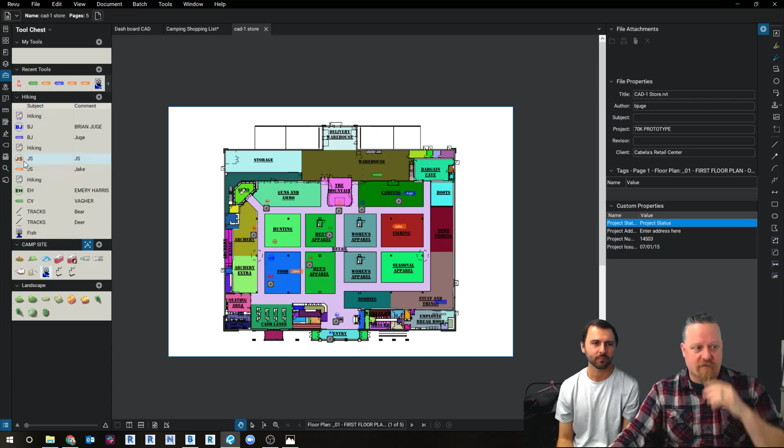In here, we can see as we're going through this, we have our different punch walk items. So Jake might be in hunting or men's apparel, he could go out there and pull that in. Now the nice part is, if we have this area defined in there, this space that could be inside, we can track where this is at, the link, the status, all these different things.

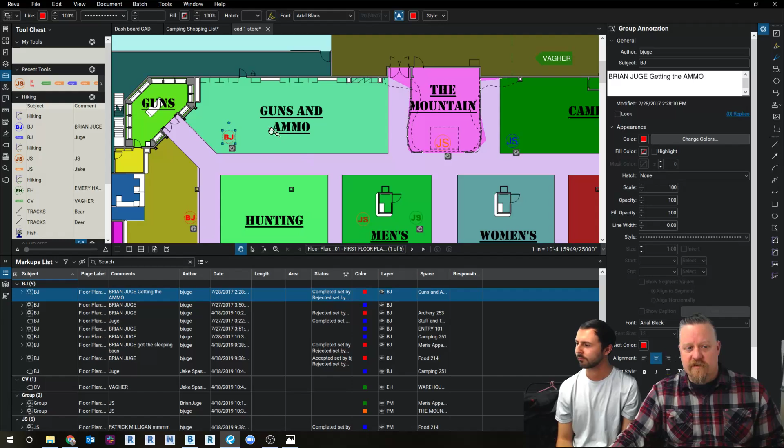We can see the spaces are in here. So as I can see that maybe I'm in guns and ammo, but if I pull myself over here into archery, it's now saying I'm under archery. And what we have is incredible—the ability to, as I'm doing punch walks or going into the store, it's keeping track of what section we're in. So Jake might be in men's apparel, and then Jake wanders over into women's apparel, and all of a sudden now it's going to update and say where you're at.

So you created spaces. What's kind of like the underlying thing driving this right now? So a couple of things—there's these hidden things inside called spaces that we can get into. Every single one of these areas is outlined in that document, and you can see as I'm clicking on them, they're highlighting in here a little bit. So if we go down to the archery one over here, it's going to light up and say that's that particular area.

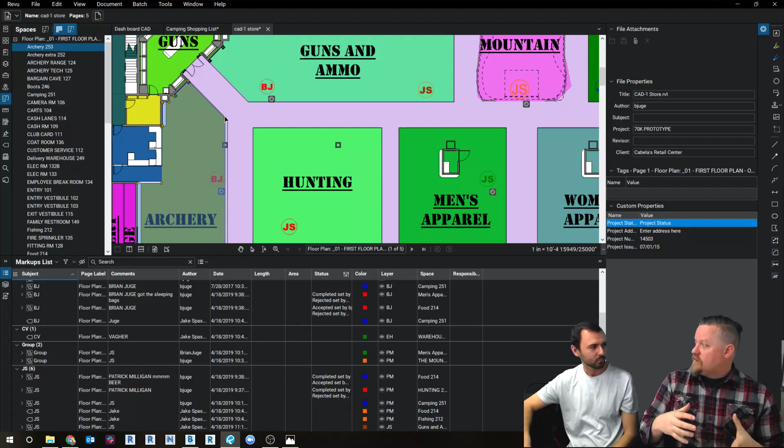Now, one of the cool things, if you have Bluebeam CAD or Extreme and you're using Revit, you can actually drag the rooms directly into Bluebeam. There's an application in there that'll allow you to drag the room information directly over, and that'll get the room name, number, whatever fields you want out of it from that space data. Another thing they put in there, Jake, is that they'll actually allow you to take the room calculations—so the areas and perimeters will come directly over with it, if you want.

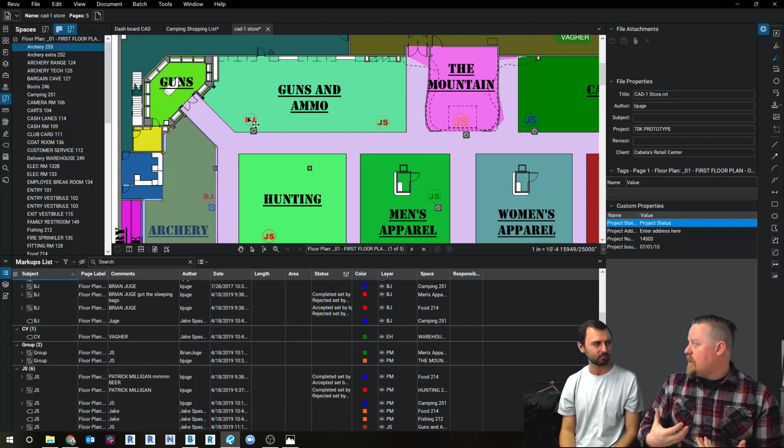So we don't have to go in and mess around with what was defining this area, what was defining this room—now we've got that in there. And so when you go to walk the site, you can go in there and put these punch walk items. Now I just have the punch walk items as our initials that we're shopping in here, but these punch walk items, at least the ones out of the box, could represent like an electrical wiring issue, or this thing was installed incorrectly, or something like that.

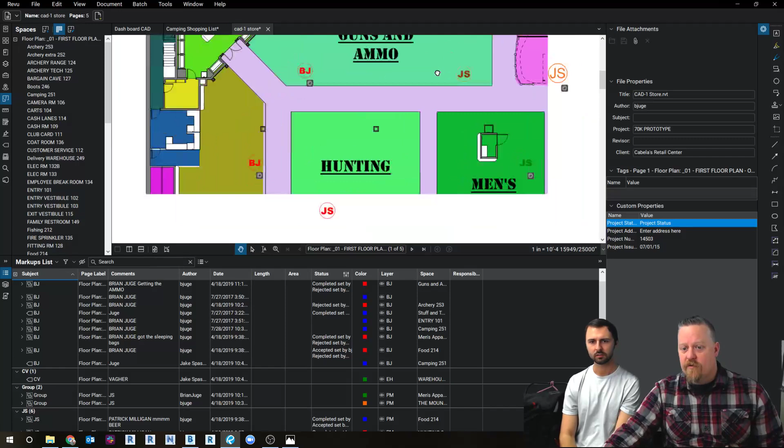And as we're going through that, we could actually take pictures to those. So I'm going to come back in here, click on this, and when I do that, I can click a picture and kind of show what that issue was that I was tracking. And obviously, as we're going through here, we're starting to track the things we're looking for on our trip, our different things. So Jake, if you come in here and wander around and get into hunting, we could go in there and capture some data.

And if we want, you got to smile.

Oh, it's not working. We're using it for our live stream. Oh, we can't do that. I didn't think about that.

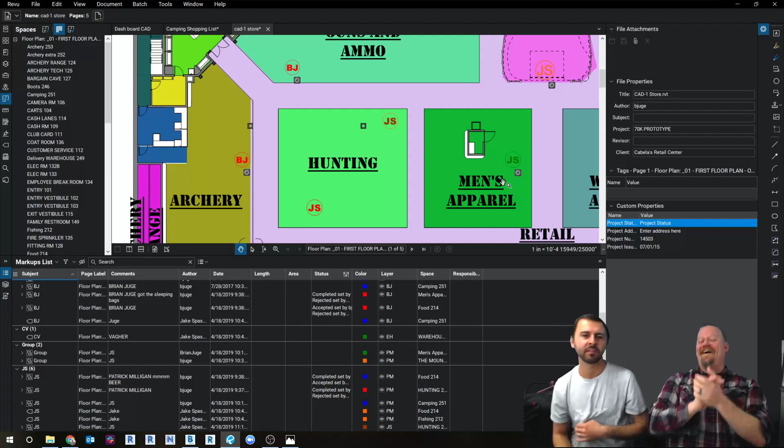I have a technical question for you. If I were to flatten the document, does that make all these things go away? Do you know? I used to know that answer, and I think they get lost.

So one of the things you can do, we're going to find out in a sec, but before that, I'm going to get a capture. Since we can't use our camera, I'll say from file here, and we'll grab this one right here. So now we've got that picture in there associated.

This is a photo of my dad and I. Yeah, there's Tony. So Tony's going to join us on this adventure here. Hopefully Tony's out there. I don't know if he's joined us. Yeah, I think you have to have a YouTube account to be able to. Oh, so that's okay, we'll talk to him later.

But you can add other pictures in here. Some of the nice things is as you're adding these pictures - here's one, this is a 360 photograph of me sitting in this chapel, lodge, taking in what's going on. So you can start doing different things like that inside these areas, taking pictures of what was going on.

Here's another one when we were at Olympic National Park, and we can kind of see what's going on. The cool thing I've been using these for is documenting what was in this space or room. So let's say you're doing some different types of J boxes and conduit in the wall, but you're about to drywall it. It'd be nice to see what was in the room before you drywalled it. Absolutely, we've done that for people. Exactly, we do that all the time. This is like the poor man's field document.

Let's bring this in. If anyone's familiar with Matterport scanning technology, what we've done in the past is when you Matterport scan something, you get a 3D image at each location. We've gone through on a 2D floor plan and dropped in the 3D images at the locations, and then people can just open it up in Bluebeam.

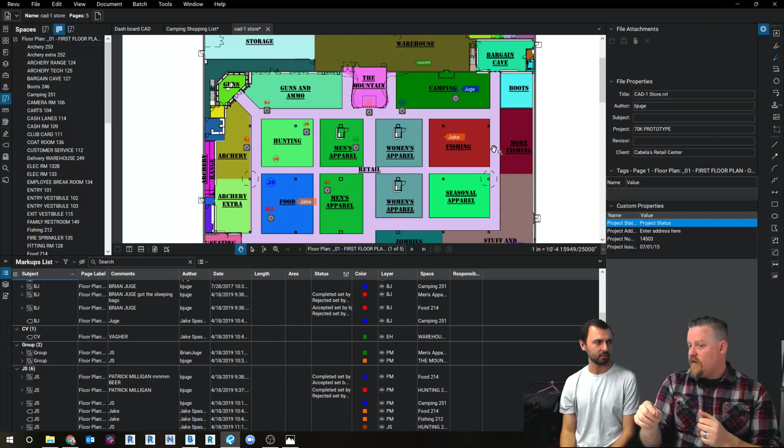And then we have a question. The tool to bring the Revit rooms into Bluebeam, is that just the Revit add-in or the Bluebeam add-in? Yes, the Bluebeam add-in allows you to do that, and then in the options dialog you have the option to go in there and bring in room data and port that directly over. When you download Bluebeam, you'll be prompted to just install the add-in.

If it's not on there, what you can do is go to your Bluebeam administrator - they moved it. So if we open up the administrator, there are the plugins. If we're not running Bluebeam, we just click on that, launch it, hit apply, and it's loaded inside of Bluebeam. Then you go back into Revit, and it's loaded into Revit.

You guys follow us, right? Yeah, we've been camping, it's been rough. Okay, so where to next?

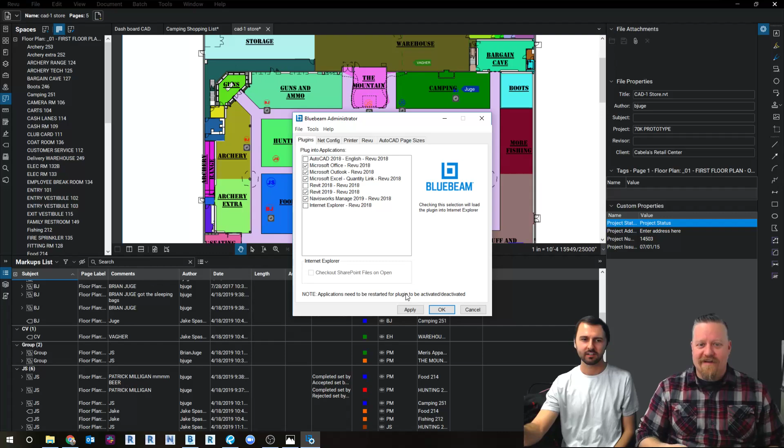Well, we have these in here. We're starting to use our little custom tool sets. I've got my bookmarks that I can link inside, we can start taking pictures. We got the punch walk that we're starting to put together and define what was in the building, but we're taking that directly from the document created inside of Revit, and then we ported it in here. We have all this stuff, we've got it color coded. It looks really pretty, but we can follow all that in here.

So spaces is just kind of a nice thing, but we can make spaces afterwards. If I want to, I can go in here and add a space and put it in there, give it a name - I'll just call it name for now. But now we have that in there, and then we could add things to this.

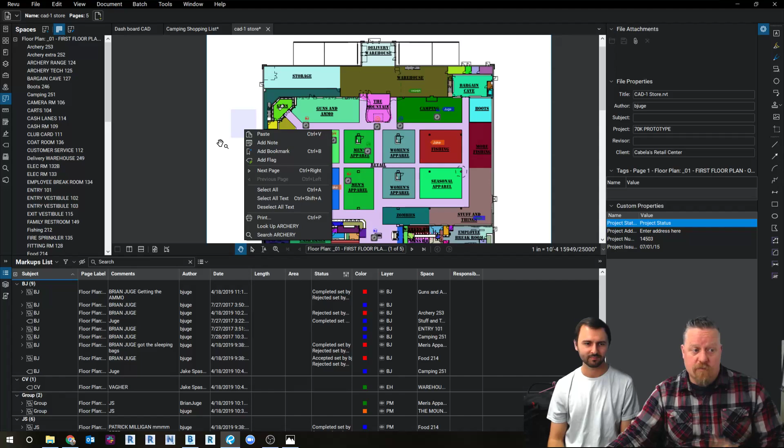Give it a different color, those types of things. So a really cool way of tracking things. And once it's done, it's in the document, people can track it and have all this data they can report back and forth.

That's awesome. All right, so very powerful tools. Yeah, we've done our camping shopping list in here. We've kind of edited things. So now we're backing in here, and we're going to actually go to the store, kind of go look at it real quick.

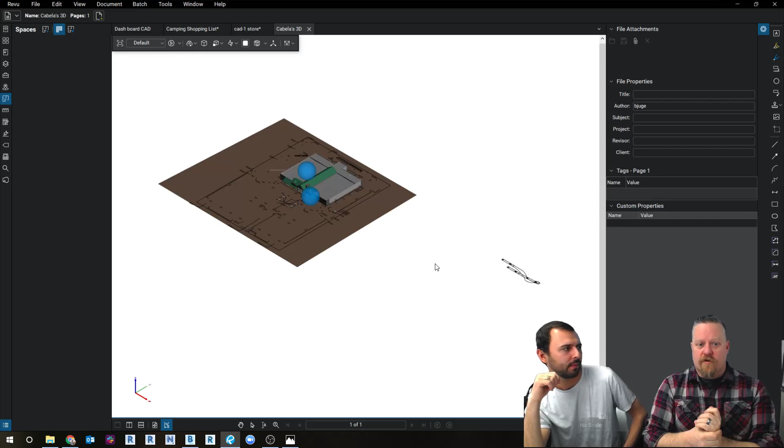This one takes a little bit, but this is another way of looking at the store. We've got the game plan. We might be buying a couple of different items in here. So right now it's taking a little bit to load, but what we're going to be looking at, here it is, we have a 3D PDF of the model.

So what you're telling me is that this is a Revit model being completely viewed in Bluebeam by itself. All you need is Bluebeam to open this up. That is correct, all you need is Bluebeam. You can use the free version to kind of open this up. In fact, you don't even need Bluebeam, we can embed this into a PDF file that some other people can use.

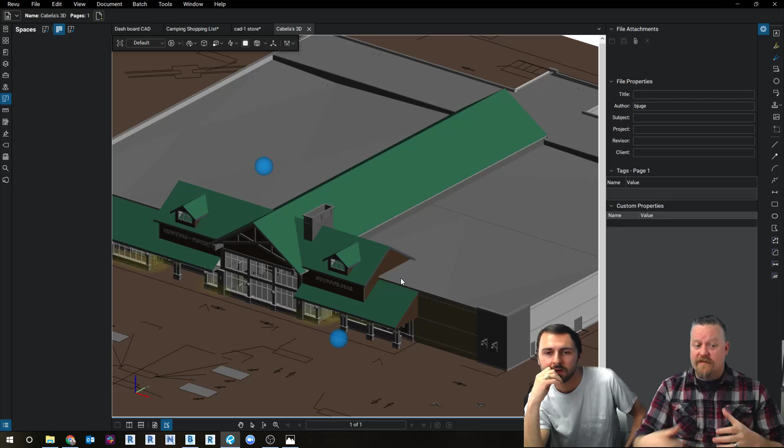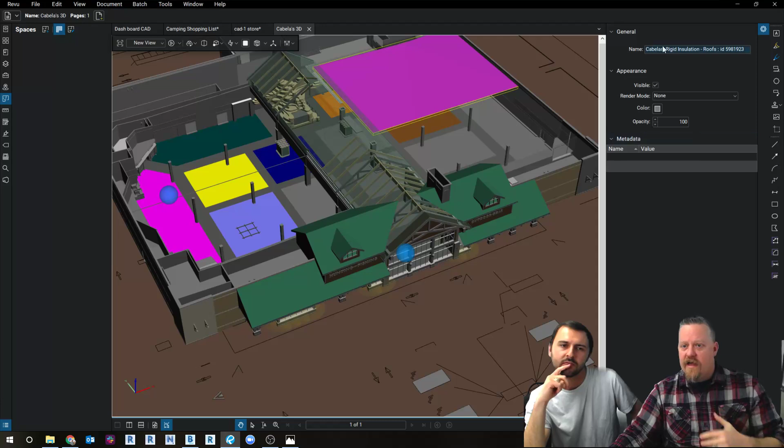And they'll have some of the data in here. So a lot of what's being tracked in here is these different things. So I've actually gone and we've got some different views in there. And if I want to, I can open this up and I can see that we got the views. We got cutaways from those different areas. So I can start to interact with this model. You can see as I start to click things are starting to turn invisible and highlight, and I get some general properties in here. But one of the cool things is this down here, this 3D model tree.

So down in here, what we find is we actually have all the metadata that's coming from the Revit file. So this is kind of like your Navisworks selection tree. This is the poor man's Navisworks. This is definitely the poor man's Navisworks.

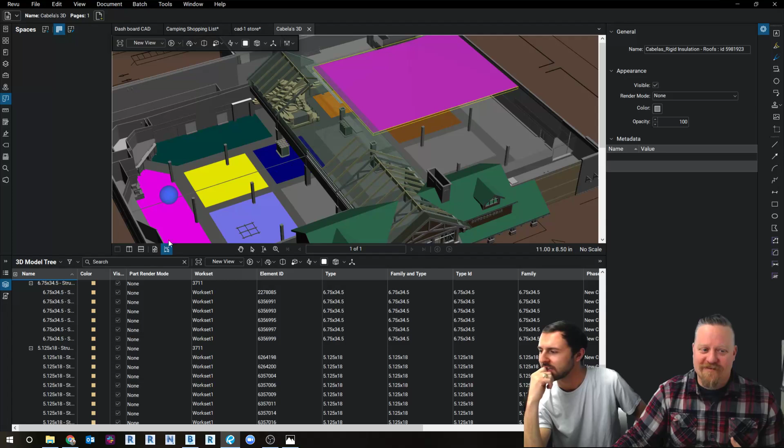So as I'm coming in here, I can start to select this item in here. So if I come in here and I've got some of the structural members in here. So I got this, bring you right to it. Brings me right to it. Gives me all the data that's inside of here about whatever this particular item is. We can see the type of material it is, the structural steel material, what's part of this, what reference level it's on, the height off that level.

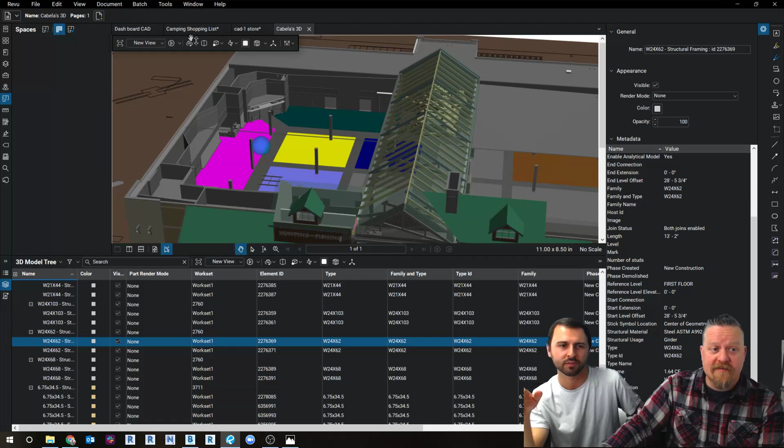So as a project manager, I should probably move my head because I can't see that. There we go. So I just see this as a project manager or superintendent on a job site that maybe doesn't have the computer to even run Revit or the knowledge to do it. They can still open up a Revit file in Bluebeam and get all this valuable data just by clicking around.

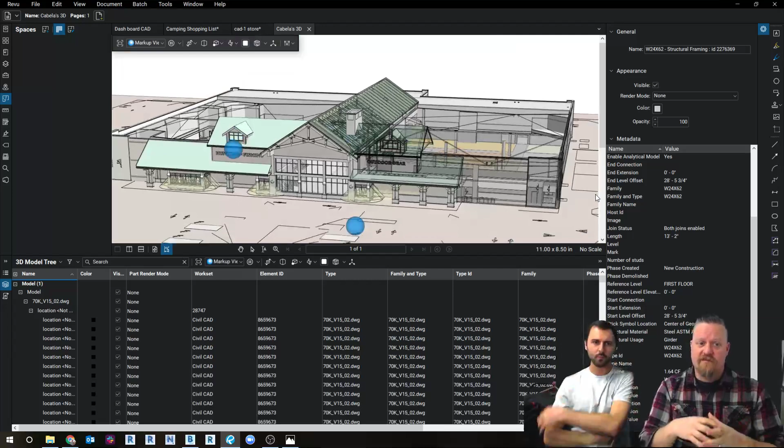Exactly, yeah, and it makes it really easy to kind of run through this. So here I'm going to let it play. So I've kind of set some views up, and here it's running through these different views. We can cut sections in here to kind of view that model. It's running around really quick, and it's a lot smoother on our end, but it's got some changes going on. So we can run back through all these different presets, look at the model, kind of set it up for a meeting if we wanted to, view that with our other documents. We can pull items apart to kind of see how it was constructed in here.

So I'm going to pause that really quick and kind of float through some of these. So if I come back in here, I've got this one with a markup on it. So you can see that we have these, there's no nice way of saying it, see these little blue balls? Those are markups in here. So as I click on them, it's actually going to take me to that view, and it's going to take me right to that markup.

So I can go to the view. I can say, hey, we got some issues in here, and I'm going to cloud that, add some notes. So I might add some notes. Broken.

Tony, this is broken, right? So we've got that in here. And if we wanted to, we can go back and take that picture again, or set a status to this and say this is currently a rejected item, Tony. It is broken, we need to go in and fix it. Then I might capture a picture of a fish, because we're still camping, man, we got to get it out there. So he can go in there and say this fish is broken, we need to fix this. We have some issues going on, and we can see we have a status set up for that particular item.

This becomes a markup, so I have to go back to my markups in here. I see that it's currently rejected by Jake, because we're logged in as you right now, this is me right now. And then as this item gets changed, we can set a status and say hey, this thing's been accepted, or being canceled, or something like that, and change that status.

One of the things we do, we can have these markups change color. We'll get to that another time, not today, but there's ways to make the statuses change. You can see as we're going through this 3D PDF, we can be marking things up, we can be changing it in there. It makes it really nice to go back in that model.

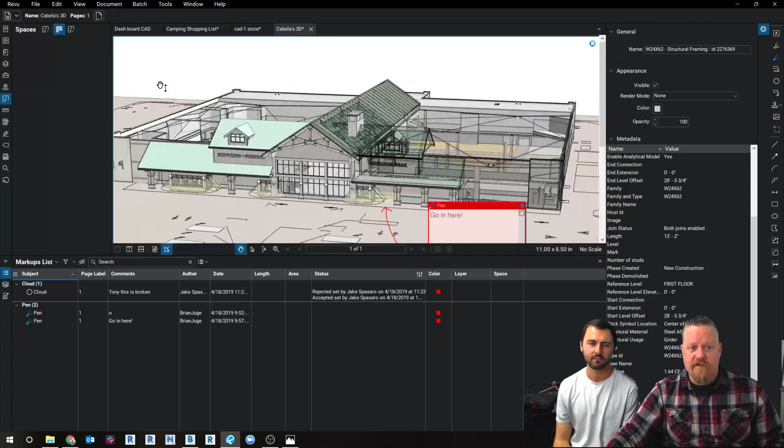So I could go in here and let's float through some of these other views. Here's another one for some of the markups. So this is where we go in, Jake, when we're going in the store, we can go in here. You'll also notice the colors change and everything else. We have the ability to go in here and change it from perspective to an isometric view, and kind of change things up the way it looks to make it look better. We'll go floating through a couple more of these in here that are kind of cool.

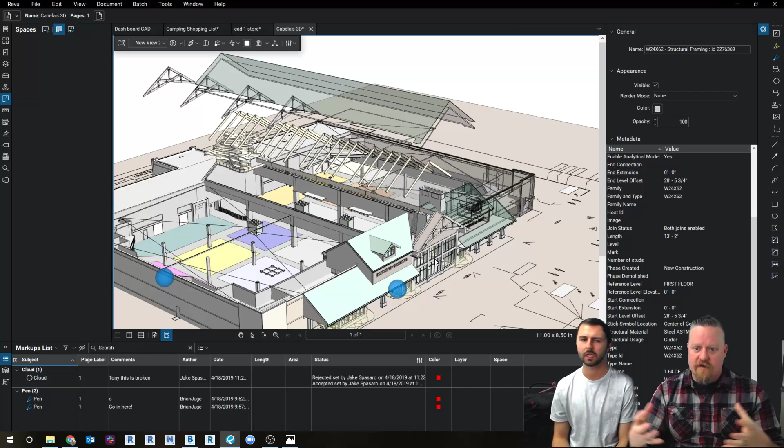So this one we run around, and now we've separated the roof. We pull the structural members off, pull these trusses off, pull the roof off. We're kind of looking at it a little bit more, pulling this model apart to see what's going on. This is a live view, so I can still spin around and do whatever I want here.

In Revit, are you exporting a 3D view, or are you exporting the project as a whole? You're exporting the project as a whole. The only time you need to do this is when you're in 3D, so you go to 3D and export this. So I could turn off a bunch of things in my 3D view and then export only what I want to, if you hide the things that you don't need in Revit. So it's kind of like a Navisworks export, like you keep saying.

It's a poor man's Navisworks, because there's actually another part to this that I've been doing. See all this stuff over here? I can enter data, so let's say I'm clicking this particular item, this changing area, whatever it happens to be. We can see it has a particular family room, all this stuff in here. If I wanted to, I could come in here and say, oh, I need to update this. This is a design option, and maybe I'm going to call this design option 1. I could actually enter that, and that data is changed inside of this PDF model.

Now, one thing we've been working on here is I've changed this in the PDF, but you can see I still have the element ID number. Can you push this back? We can push it back. You can push it back. We have the ability, not everybody does, but we have the ability to push this data back from the PDF directly.

How do you do that, directly into Revit? Well, we got some magic we're going to have to do, I'm not prepared to do that. Oh no? Okay, yeah, sorry. It's a teaser, I should have, it's a teaser for later.

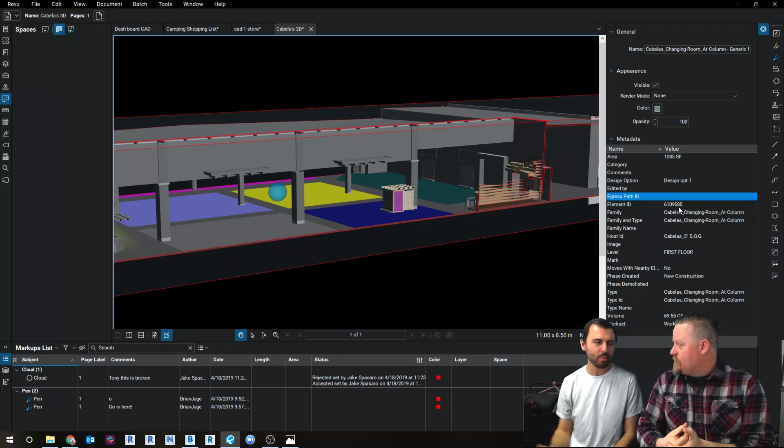We're going to move on, we got some camping to do. We can jump in here and do a bit more. You can see here's the section model, we can get into this, we can pull that section out some more and kind of see what was going on, cut through that floor plan a bit more, and just see, hey, this is the model that we're dealing with in here. Let's go camping. All right, so now we're gonna get back in here, go to our dashboard, and we're gonna go set up camp.

We're going to the campsite, so we're gonna set up camp. This is pretty linear, all right. So here we have our beautiful camping spot, and here we got a lake.

Did you draw this? I did. You may not know, I'm an architect, so I had to draw things sometimes by hand. So here I have these trees, right? I can put a little tree in there, and I drew this. This is a pretty little tree. I like the shadow. You like it?

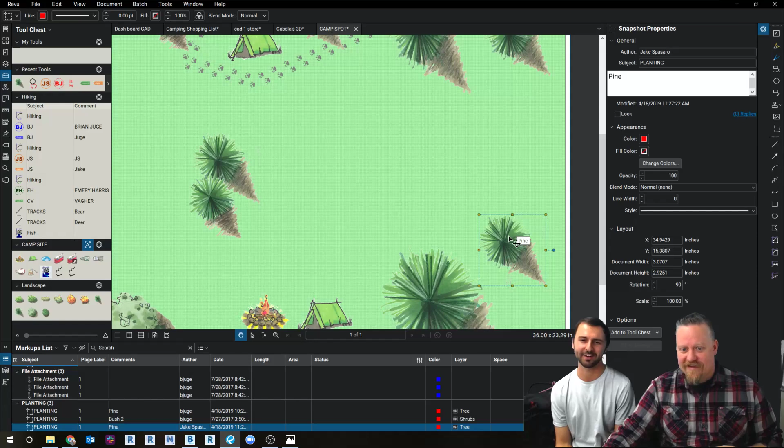So I got the trees, the shadows. These are all things that we built, right? But we're coming to this camping site, so we're gonna show up in our truck, all right? So you and me, we're gonna go out there. Tony's gonna join us, we're gonna drive on out.

And it looks like a spaceship. It does look like a spaceship. This is plan view. You know what looks more like a spaceship is our trailer that we're pulling. It looks more like a propane tank, I think. So, I don't know, this has kind of got the red doors and stuff on it.

It's good, it's good. I have a propane tank. You do. This is propane, and it's not invisible because it's red. They told me I couldn't light it on. We'll say that at the end in case something bad happens.

But this isn't just a camping trip, Jake. This is a fishing trip. So we brought our boat too. We can pull it back here, or we're just gonna drop it, we're just gonna put it in the water. That's useful. Yeah, so we've got it.

Our fishing boat, our little trolling motor on the front end. We got this, and the nice part is, if we click on it, this beast gets like 15 miles per gallon in a 60-gallon tank. So we got that going for us.

All right, so as we're getting out there, we're just going to quickly set up tent. We need our tent. So this is your tool chest. So talk about what could be in a tool chest other than camping goods.

If you're doing mechanical, this could be all your fire dampers, diffusers, things of that nature you could be putting in there. We could have our ductwork put in at different sizes. And this is custom, right? This is custom. This is for you. Anything you want.

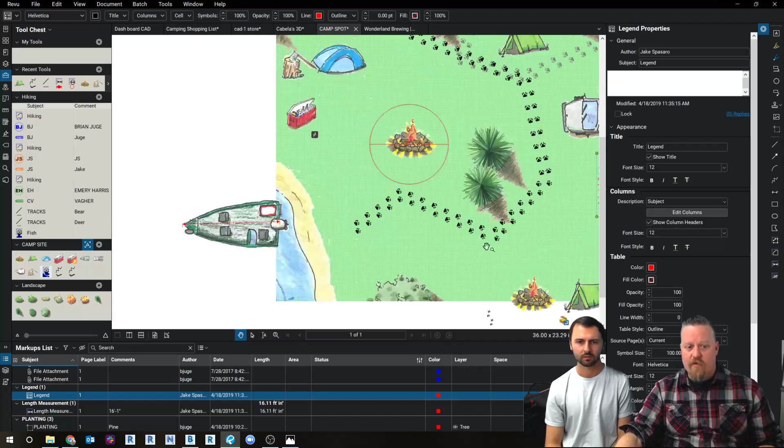Yeah, and then you have these custom count tools, and I'm just using trees and stuff, but you can have that automatically calculate that for you. In this legend, we can say, what else do we want to see in here? Maybe the date it was created, or the depth of the rise, or the total volume. Jake, it would be really nice if we knew how much fish were in this lake, or at least how much water was in there. I'm always wondering how much water is in the lake.

So we're going to come in here and just measure that out. When we do that, we can see that this lake has 18,000 cubic feet, and it's still working off our calibration from the boat. So we still have that same calculation and the same kind of data. Now, this is just taking an average, I think at 15 feet is what I did for this summation. But if we were doing concrete takeoffs or something like that, we can have this go in there and do fill takeoffs.

And it'll do slopes too. So if you were doing a ramp that's sloping, we can have that calculate that slope value in there and add that to the total report and see what's going on. You can see it's customized - we got our custom fill pattern in here, little wavy lines to make it look like water. You can customize this, and that was the biggest thing I was after, showing people that it doesn't have to be this drab thing that we're looking for.

I think 2 people in this room are colorblind. You mean the 2 of us? Yeah, I mean the 2 of us. So it helps to have more than just colors to identify things - we need patterns, we need lines, we need other types of things in there to kind of help us out.

So it's really nice. And there's a deer again, man. He keeps coming back, just bouncing around.

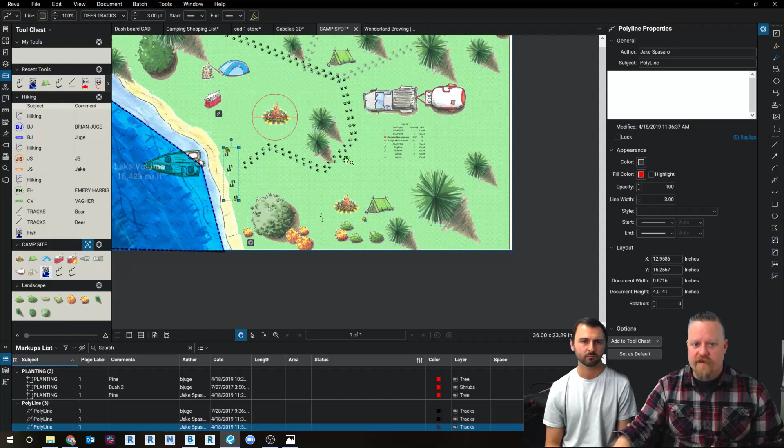But we're able to go in there and change these things. So not only is it color, but it's line type, fill patterns, everything else, so everybody can identify and see what's going on within that area. And as these things are updated, we can get this in here. So if I want to go in there, I could add this to that form, update that to the legend and add that to the legend. And now we have the fish, the water that's going in.

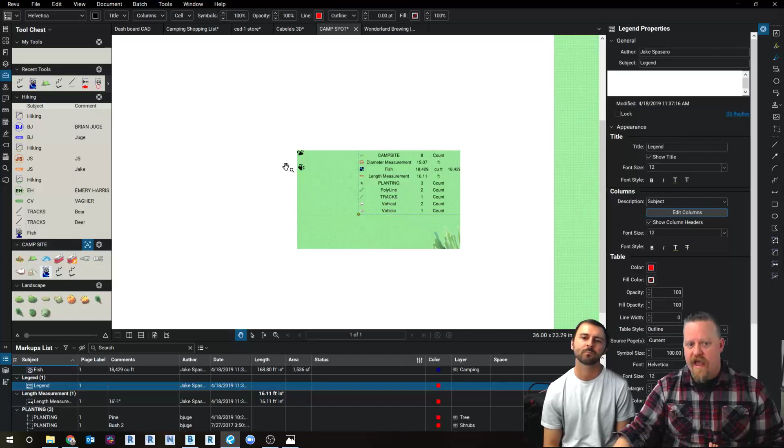And if I wanted to, I could edit the columns and add up a volume in here. So I can grab the volume, and that particular one's showing the volume of that lake. As that lake grows, or I add more things, that number's going to update automatically. Can you export this to Excel? Yeah, we could get these items to export to Excel from down below, so we can export this list, send that out to Excel, and have those fields dropped in there.

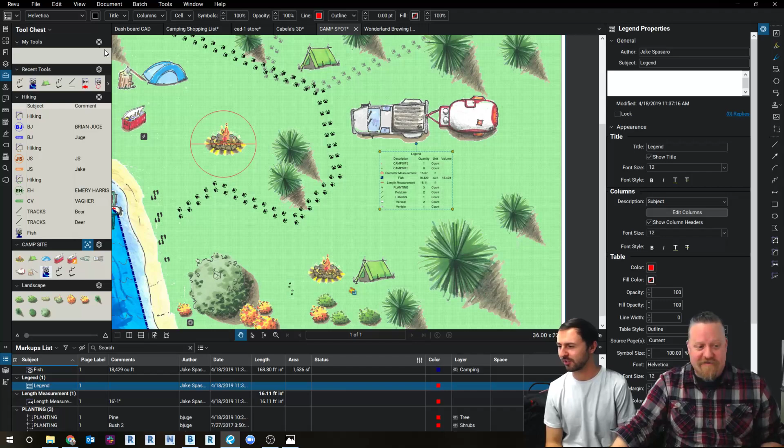That's a good preview. That's a good segue. I like that. All right, I don't know if we have any questions going on, but we're gonna go back. We're good on questions right now. If you guys have any though, drop them in. Or if we completely bored you, just add a comment, say bored. Well, I'm having fun. I'm having a great time. Yeah, this is my favorite LABLive yet.

So now we're going back to our dashboards in here, and we got to do some more takeoffs. So now it's time to go to the camping trip. We set up camp, now we're ready to do some takeoffs. Let's do it, get some actual takeoff measurements in here. So we're gonna grab takeoffs, and here we have I think it's Glacier National Park. Yeah, because there's a Canadian side.

So we got Glacier National Park, and look at this, Jake. We're already mapping out some camping trails here. We're in Montana right now. So here I've done a little hike down inside, and I've just followed this camping trail, and it's counting up the number of feet I have. Okay, so then we're going to get to some of these lakes.

So we can go inside and say, hey, where's Jake? This is Jake's camping trail here, so he's done some hiking, and down below it's going to keep track of his different hikes. Let's say Jake wants to hike up this trail. So maybe he started down here, double click, he likes to wander, and he went 49,600 feet. That seems like far. That's a good hike up to these lakes up here.

So one of the things we can do is, let's say we're trying to do all these calculations, but we already have existing things that we're using.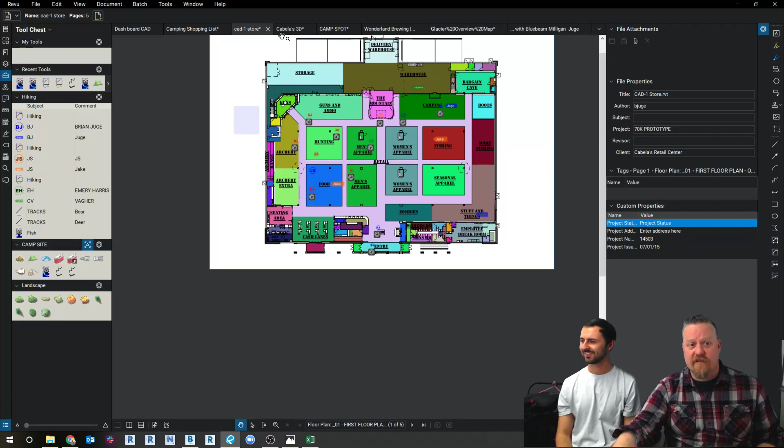But from a contractor, it's priceless, Bluebeam, being able to use this, do the markups. So just look, we did that form creation, we went in, we did our punch walk, we saw those elements in there. We've got the store, which always takes a little bit to load, but you could view those 3D PDFs, kind of explore the model. That's amazing.

All these really cool things in there. Do the markups again, it's that poor man's PDF. We did our markups in there, and they can be very custom. We can count them, we can kind of review those in there, and then we went in and we did our takeoffs in the field, literally.

Do we have any final questions? Yeah, before we bail off, we gotta wait a few seconds. This has been very fun, I've really enjoyed this. Oh, I can light my stove now. You can, you can light your stove. So awesome, well what are you doing? Oh, you're lighting the stove. I was like, what's going on here for a second? Jake, there we go, you're not even on camera with that. So I don't think you can see it. It's on, I can feel it right now.